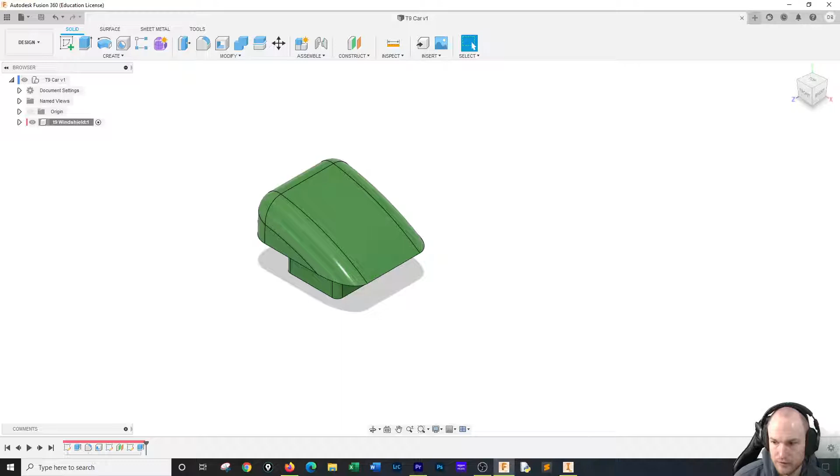I want to get out of my sketch. There we go. I want to do a new component. And I'm going to call this the midsection T9.

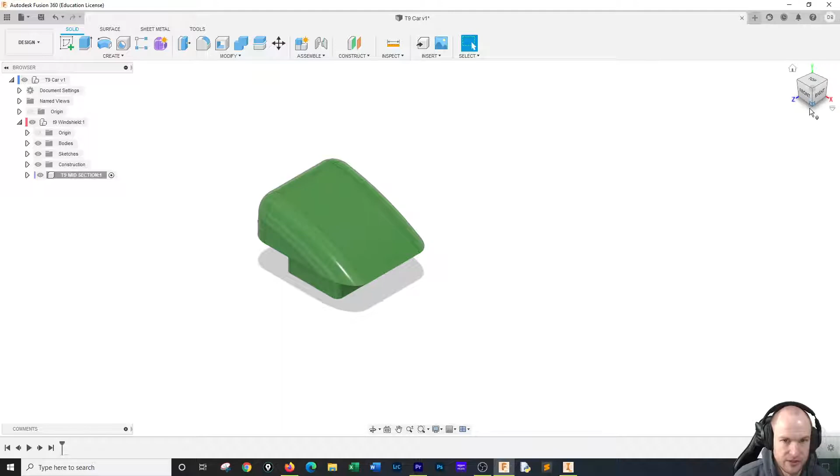Midsection, okay. So here we go. And I've got choices here. I could draw it and use this, like draw it right within this piece, making a sketch here and draw around this and do it that way, or I could draw it regular and then assemble them when I'm done and just kind of work at it.

I feel like the way I want to draw this piece, I'm going to actually turn the windshield off so I can't see it. For some reason, this is like a subcomponent of the windshield. I don't want that.

So I made a mistake when I created this component, so I'm going to just get it out of there. So it's its own component.

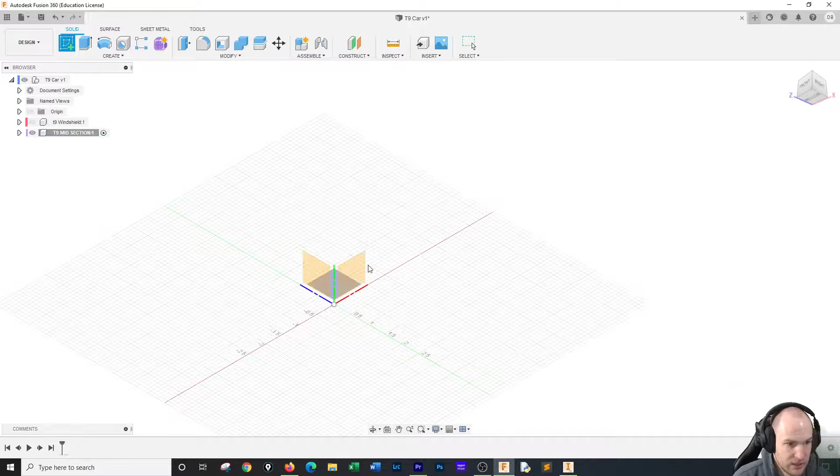And I'm going to make a sketch, on this face, on the front face. And I'm going to extrude this to be, or make a rectangle that is

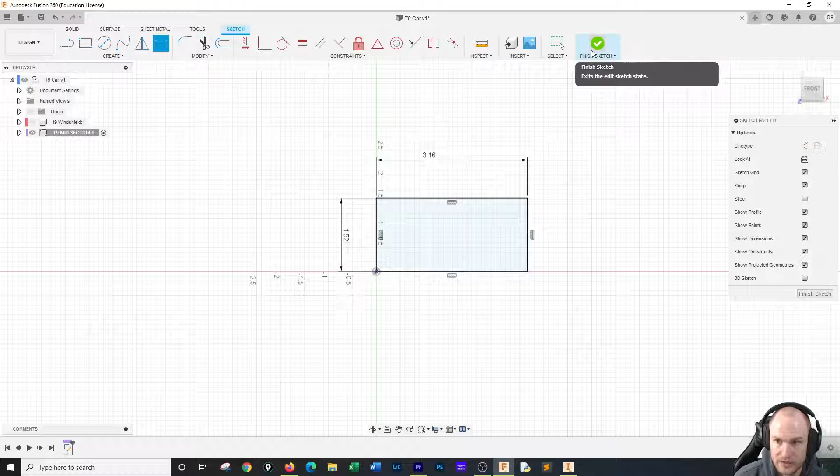1.52 by 3.16. And I'm going to extrude that 3.16. Extrude this 3.16.

Okay, now this material, I definitely don't want to be that. I want this to be physical material. I want it to be some kind of wood. So let's see, I want this to be, and all your wood pieces should be the same. I'm just looking at what we got.

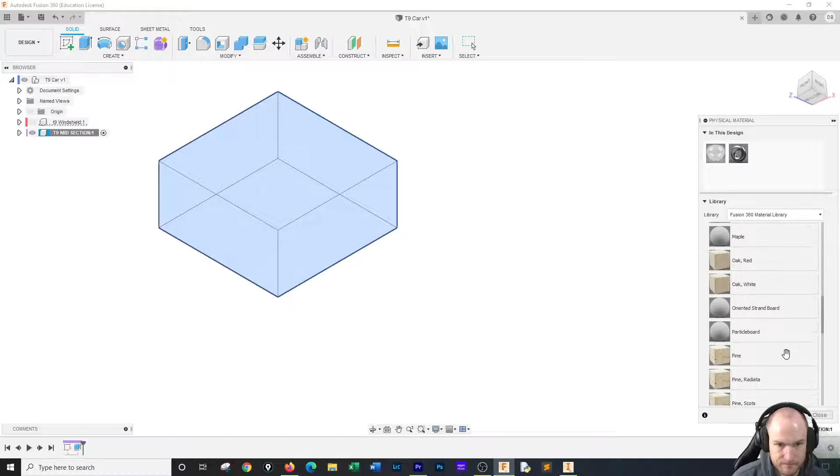Decisions. Let's go with cherry. We'll make a, no, I don't like the cherry. Let's go with white oak. No, I don't like the white oak. It's not pine. It's actually birch, but oh, what does birch look like? It doesn't give us a skin for birch.

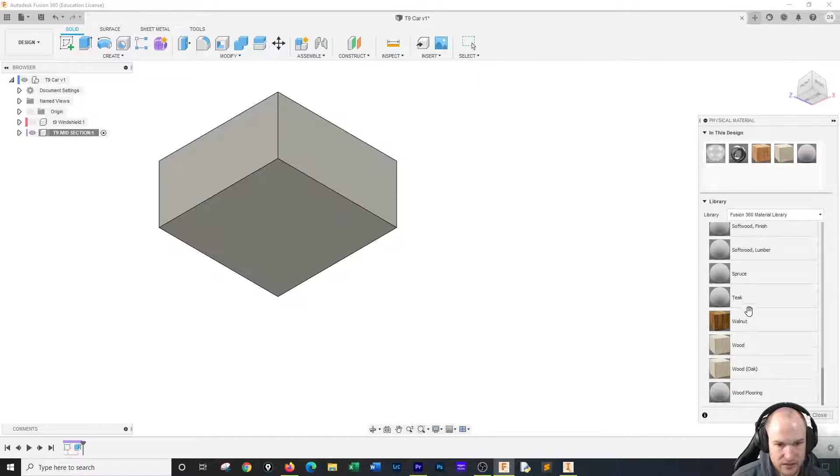So we'll just say generic wood oak, and we'll go with that. So that's the one you should be using, generic wood oak. And we'll close it. You could have done that at the end. That doesn't really matter. But moving on.

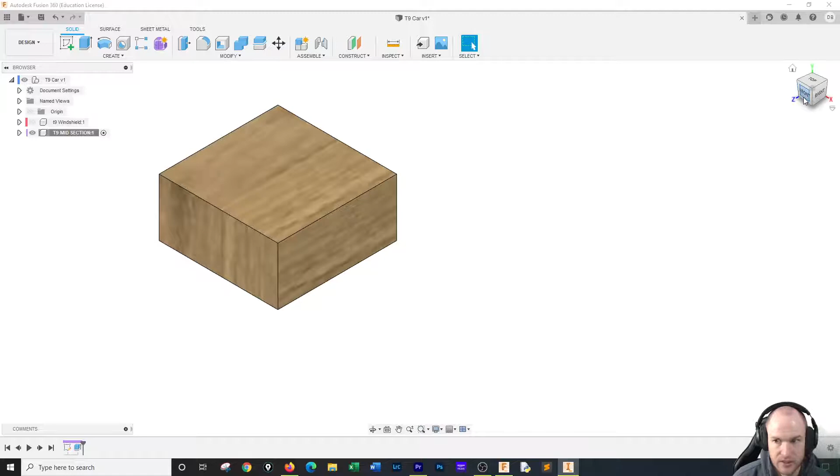Extrusion 2. We need to pick the front of the vehicle in terms of like the front, like maybe the side, but they're both the same. So I'm going to go with the front here.

And I need to draw a rectangle in here that is 2.4. Nope, the other dimension is 2.4. 2.4 long and 0.93 tall.

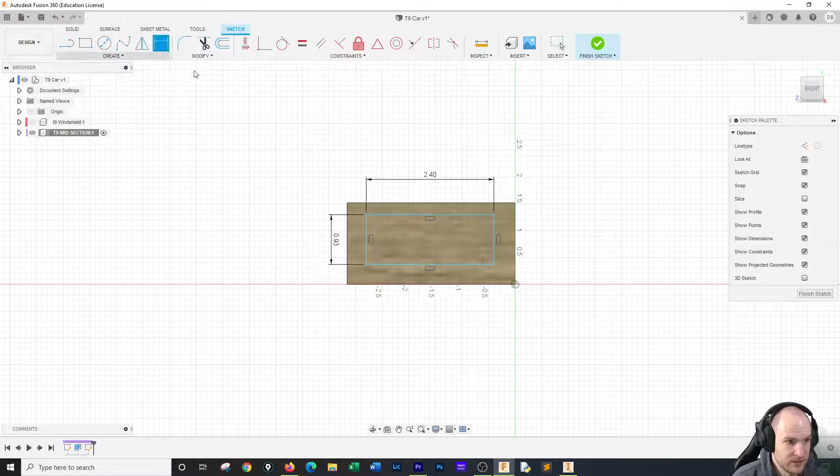Okay, I need to center this. So this distance here should be 3.16 minus 2.4 in parentheses, and I'm going to divide that by 2. And that'll give me the center, or half of the value. So that centers it.

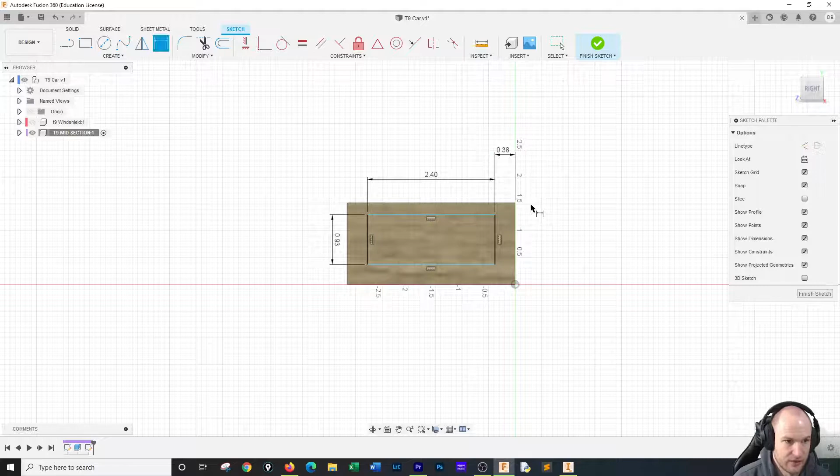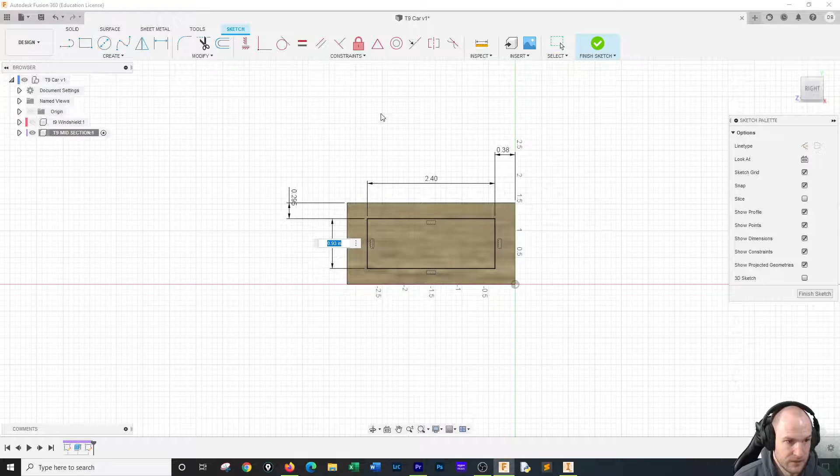And then it's kind of the same thing for the top and bottom, but I happen to know the top and bottom we're going to use 0.295 because the drawing I'm looking at is giving me that dimension. So this should be 0.295. Okay, that's fine. And I need to add some fillets on these corners.

All of these fillets are going to be at 0.2, so that's what the default was. That's what we're using. And I'm going to hit OK. So finish sketch. That's going to be extrude cut in 0.57.

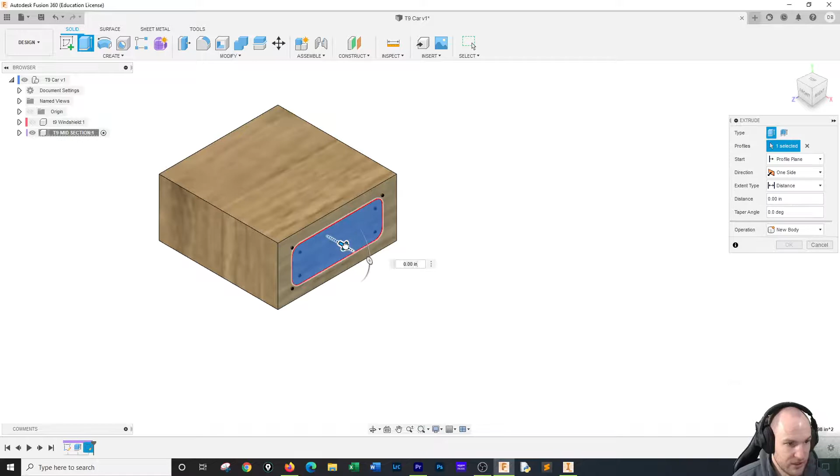So I'm going to grab this. I'm going to cut it in negative 0.57. I'm going to make a mirror plane, and we're going to go in.

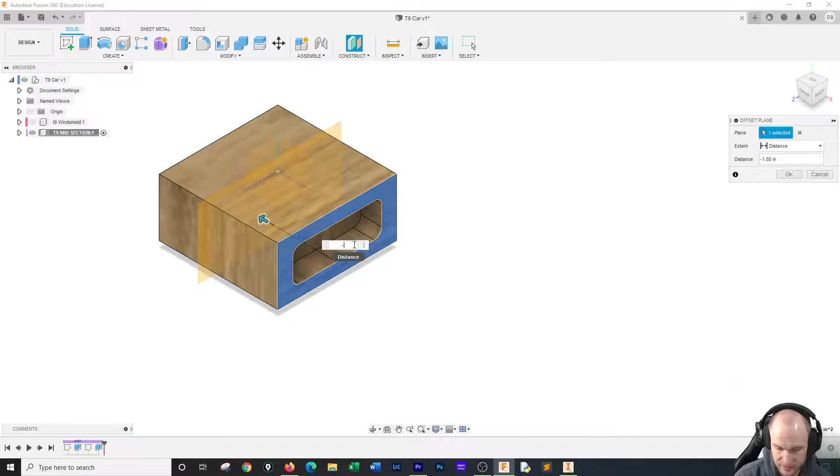How far am I going to go in? We're going to go in negative 3.16 divided by 2. That puts the mirror plane in the center, and that's going to allow us to mirror our feature. So I want to go to mirror.

I'm going to select what I wish to mirror, which is this. So that's the extrusion, and then our mirror plane is going to be here. And that will put a notch on the other side, which is hunky-dory swell.

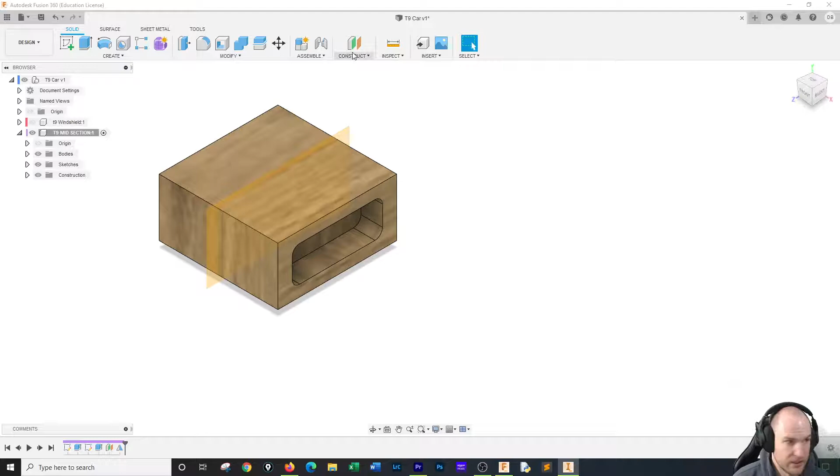Okay, the last extrusion I've got to cut out of the top. So let's make a sketch up here. I'm going to draw a rectangle in here.

That is, let's see. Just want to make sure I'm grabbing the right sides for the right things. Okay. So this is going to be 1.98, and this is going to be 1.59.

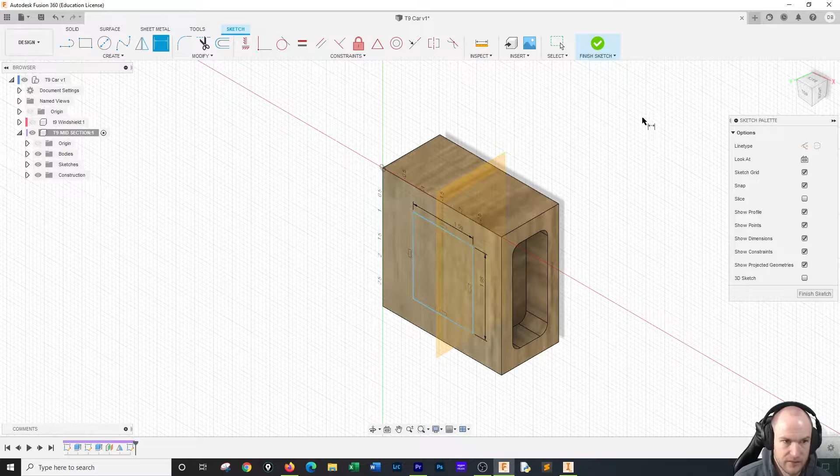I'm going to look at it from the top. And then we are from here to here. This is going to be 0.59.

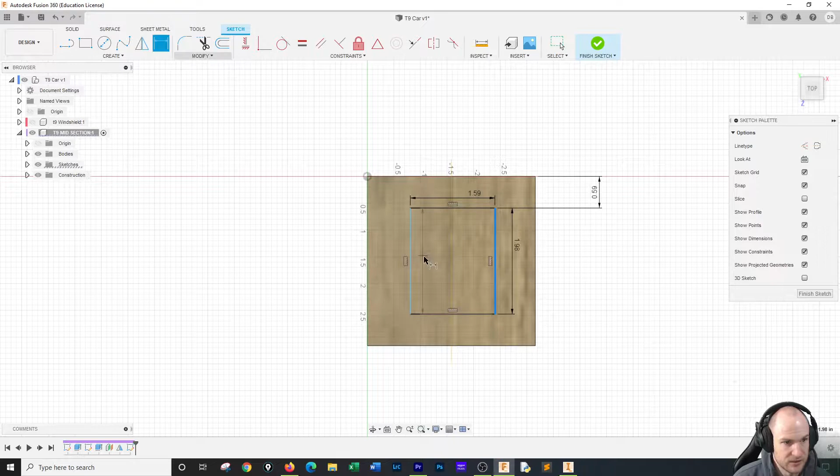And then from here, from the back edge, sorry, I should go from here to here. That's going to be 0.81. And that happens to be exactly correct, which is a big coincidence.

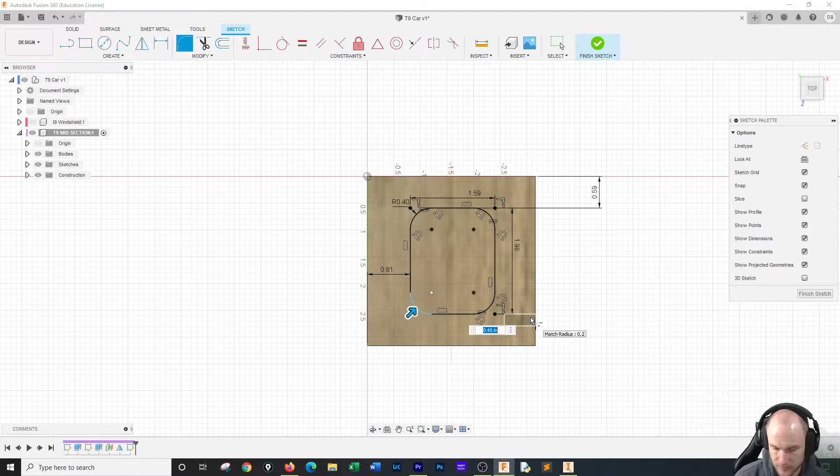Once again, we are going to fillet. 1, 2, 3, 4, 5, 6. All of these fillets should have been 0.2. So I was able to change it all in one fell swoop. So all of those fillets are 0.2, as you can see there at the radius.

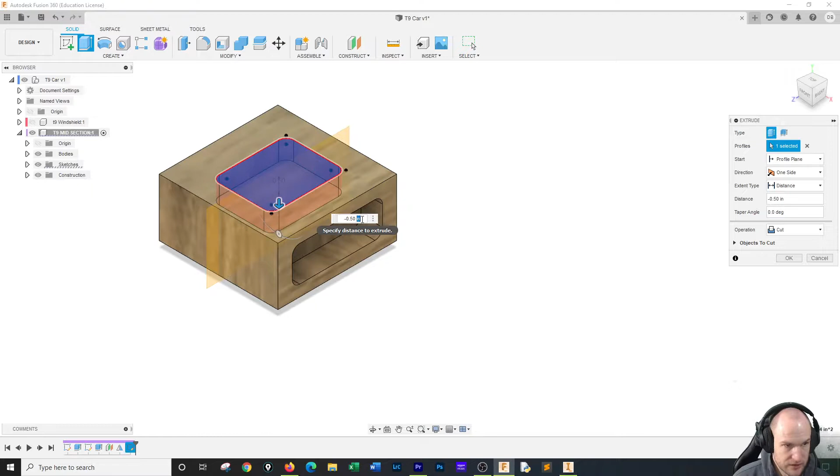I'm going to hit finish sketch. And I am going to cut this out. And how far do I want to cut this? 107. So I want to cut this out. So it is 1.07 in the negative. Hit enter.

And then I got to fillet the sides, 0.3. So let's go to fillet on these sides. 1, 2, 3, 4. That fillet should be 0.3.

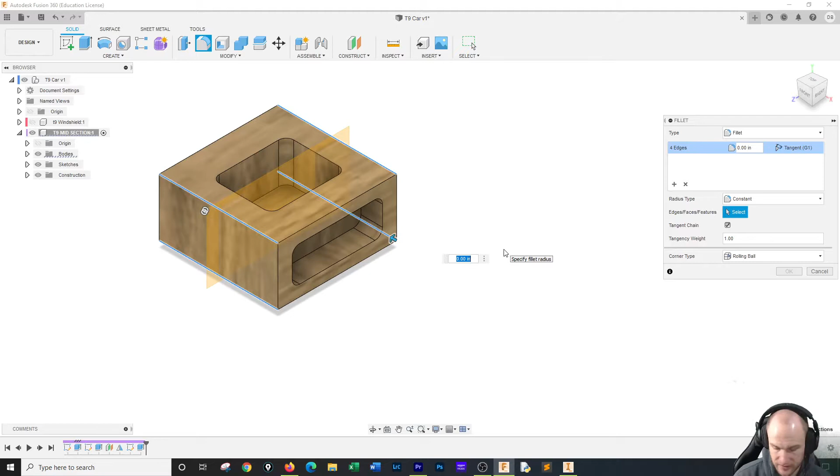Okay, I'm going to make that invisible. And now if I wanted to, I do not have to yet, but I could start working on assembling this by putting this piece on here.

Not going to do that yet because I still have a base that I have to put in there, and I'm actually going to draw it in there to make my life easier. And I will probably do that next. So here is the T9 midsection.